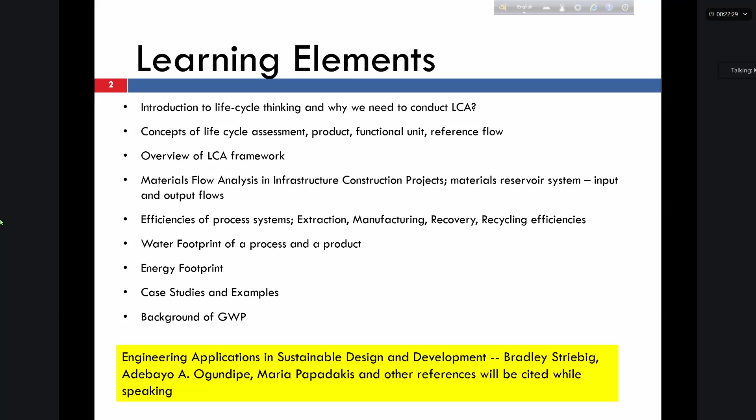So we all know the SDGs from the UN, the Sustainable Development Goals, or when we were students at BUET, I think Shamsul Haq sir was talking in class about the MDGs, Millennium Development Goals. Now, one of the things those international organizations emphasize to people is sustainable development.

So basically, whatever we develop, design, construct, we need to do in a way that meets the current needs without harming the environment and affecting the ability of future generations to meet their needs. It's a very big objective actually. So we have to design or build our road in a way that does as little harm as possible to the environment in the first place, and then without affecting the ability of future generations.

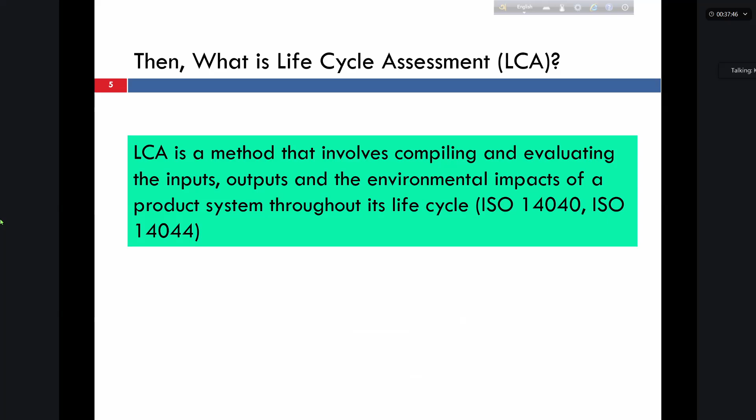But today and in the next lecture, I will basically talk about the LCA environmental component, in particular for pavement, and some other subtopics, and a little bit on the software for pavement LCA. Again, some examples of why we need to conduct LCA.

For example, we eat meat in general, and in particular beef. So the UN FAO, the Food and Agriculture Organization, predicts that global meat production will be doubled in the next 25 years, by 2050. And 18% of greenhouse gas emission comes from the cattle industry or livestock production.

And they also estimated that to get 1 kg of beef that we buy from the store, it emits 36.4 kilograms of carbon dioxide. It's such a big scale: think how much beef each nation, each country, consumes, and imagine how much carbon dioxide is emitted every day just for beef.

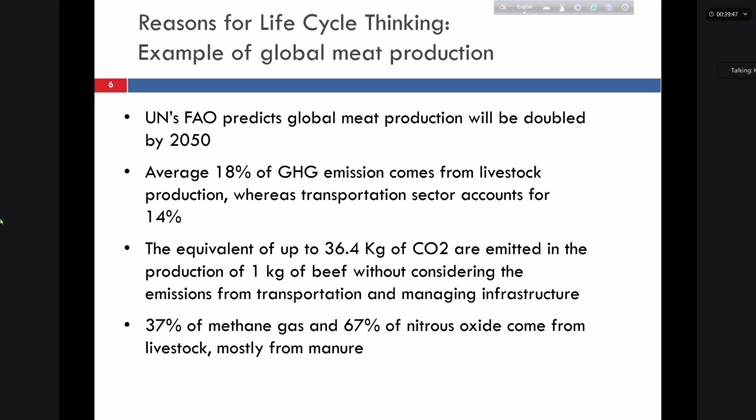Another example, again from the book. Our everyday product, like a sandwich we eat in North America, in particular bread and butter. In the book, they reported a research paper on that. The average American consumes more than 6 pounds of peanuts and peanut butter products each year. The amount of peanut butter they eat, with that jar, can wrap the whole earth.

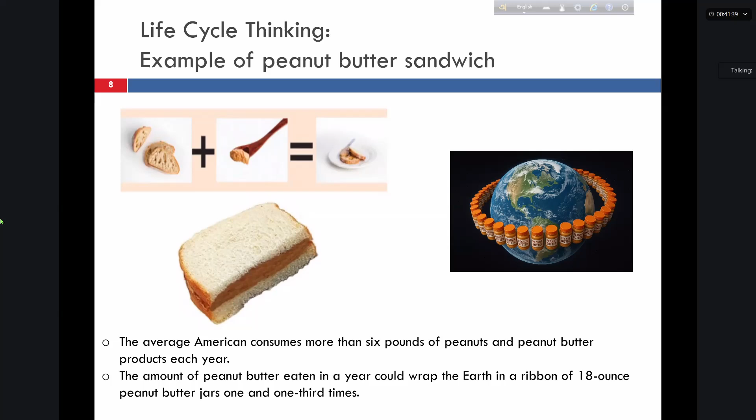So now let's look behind the scenes to make this sandwich in the morning, what people are doing. To get the bread, it's coming from the loaf. We are just taking two pieces of bread to make our sandwich, but the whole loaf is manufactured, and it's coming from wheat flour, from the wheat, and wheat is coming from agricultural land. So many things are going on there: preparing the land, watering, fertilizing, picking up, processing. There are so many stages involved to get this piece of bread in our breakfast.

And in every stage, there is some environmental relevance, either energy consumption or chemical utilization affecting the environment, deforestation, water consumption, transportation, equipment use. As you know, there is a lot of equipment use in Canada on agricultural land, and emissions from diesel burning. This is the bread part.

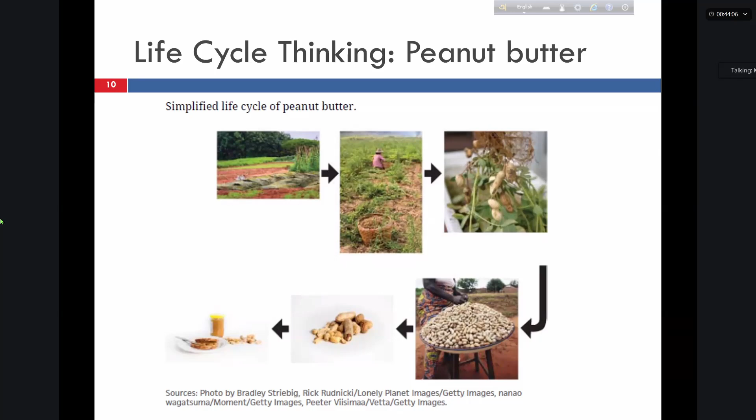So this figure shows at a glance the main processes involved to produce this peanut butter for our breakfast table. For example, to produce the butter, not only the peanut portion, we also need sugar, we also need oil. They are transported to the manufacturing facility. They are roasted, mixed, and then jarred and packaged. Again, they are transported within the factory or to another factory if done by different people. Transportation is involved. Think about the volume of the materials.

We are talking about the butter. What about the container, the jar? We need glass. We need steel for the lid. We need paper for the label, expiry date, the nutrition label. We need ink. And in most cases, they are manufactured in different plants, different cities. They are transported to another assembly facility, and transportation is another 14% of total global greenhouse gas emissions. So much petrol and diesel is burned during transportation by those big trucks.

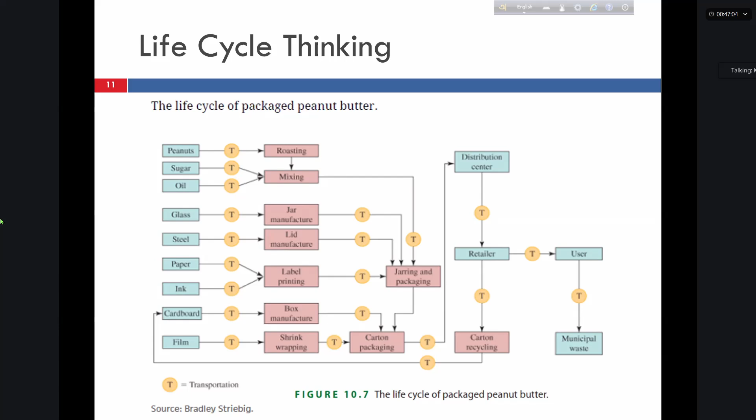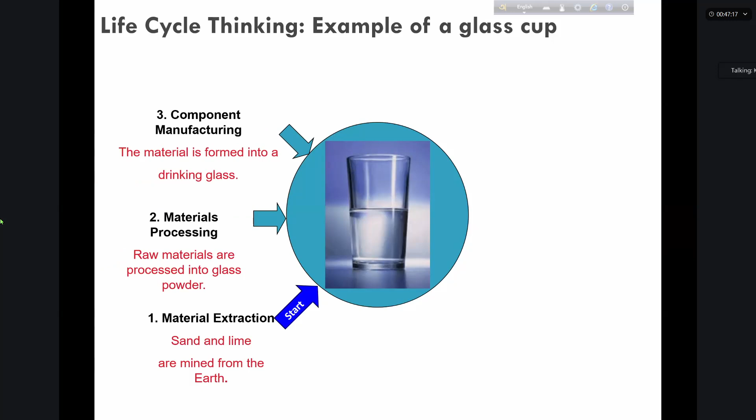Again, another example I already explained a little bit is a simple glass, but so many processes are involved to see our mug or glass on our table. First of all, material extraction: sand and lime are mined from the earth. Raw material is processed into glass powder. Then these raw materials are formed into glass, assembled, and then they're distributed, and then maintenance and the use phase, and again it goes to disposal.

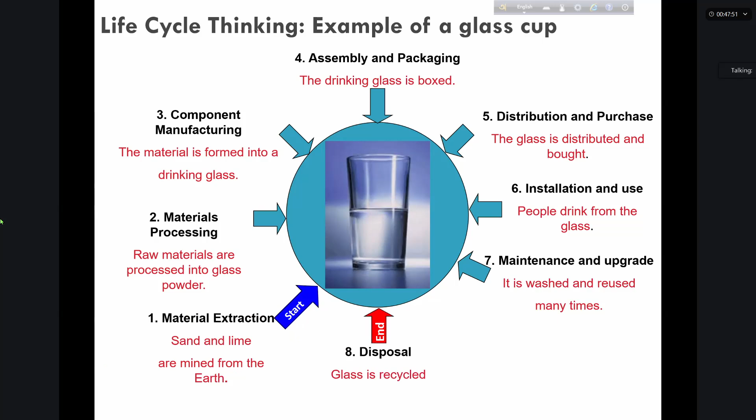So this gives an overall backbone of the stages. So basically, we are taking the raw materials from the environment. We call it natural environment or natural resources given by nature. We are transporting them to the manufacturing facility. You can think of your product if you are working. Okay, very similar in pavement and other industries.

Then after manufacturing, it is packaged or distributed, or goes to the use phase, and there are some maintenance requirements. For example, in our field, the pavement field, think about the maintenance. For asphalt, every 5 years we have to do maintenance. We cannot forget an asphalt road, but concrete probably yes, the first 10-15 years is okay. And maintenance means closing the lane, doing it again, we do a lot of shaping and paving, removing the top layer and repaving, again construction, the same cycle starts again, but at a smaller scale in the maintenance phase.

For buildings, there are a lot of maintenance activities, like I'm talking about commercial buildings, office buildings. Because we are civil engineers, managers, design engineers, executives, we probably don't look at those things, but there is a lot of maintenance going on related to leaks or the thermal system, to improve the efficiency of the air conditioning system. In good buildings, there is a lot of maintenance work going on all the time. So everything has environmental relevance or environmental impact, and then it goes to disposal.

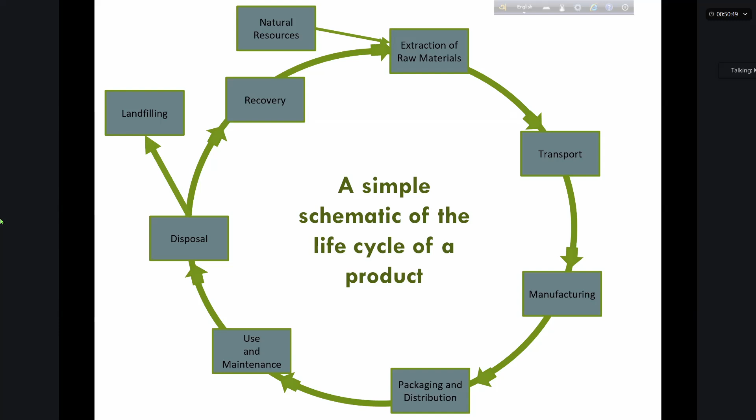Okay, so by this time we should have a good understanding of the stages of a product. Basically extraction stage, and then manufacturing stage, and then use stage or use phase, and maintenance phase, and then disposal phase. That's in general, but it depends on your product. Some phases can be merged, and whatever it is, you have to define your phases before you do LCA of your product, because that will give the boundary of your data collection.

And each stage, say in road construction, first of all we need raw materials. One is aggregate, the other is binder, asphalt binder. To get the aggregate to our desired state, say 3/4 inch or 1/4 inch, there are so many processes involved to get those stone chips. And for the binder, it's a huge, gigantic process. The asphalt or bitumen that you see people using on the road, there are so many stages and processes involved, so much engineering, because it's coming from a mix of so many heavy oils from the oil reservoir.

And so many distillation processes to separate those heavy oils coming from the oil reservoir. And after separation, a lot of engineering is conducted to make it road grade, and then it's coming to your site, and then you have to heat it up again to make it liquid, to make it fluid, so you can coat the aggregate.

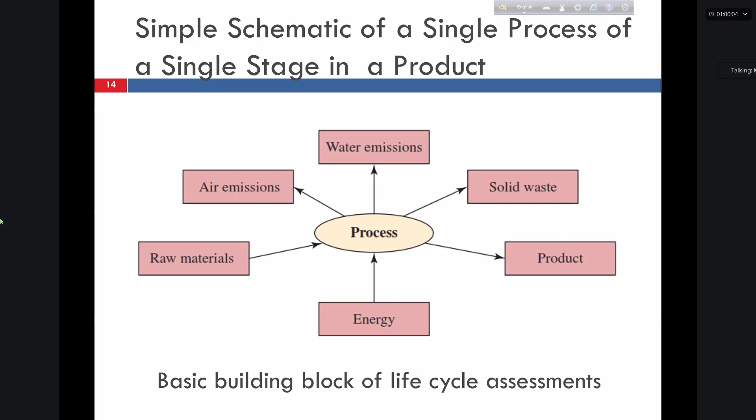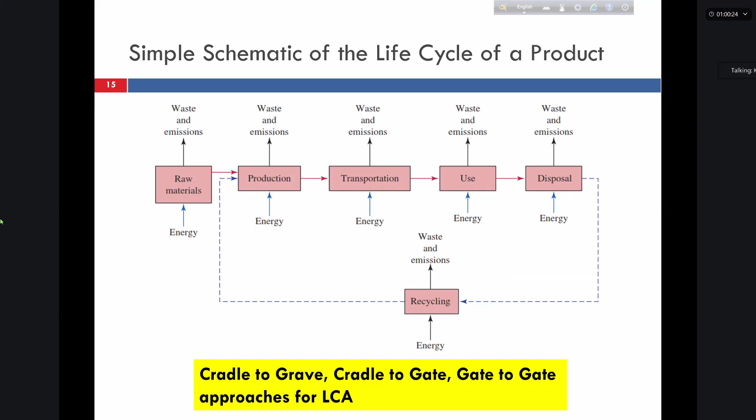So as I said, this is the building block, but at every stage, for each process, we need to capture this information if you want to do LCA. So one question probably already answered: what is the goal of LCA? The overall goal is to reduce the environmental impact, and LCCA is the cost part, which I'm not covering in these two lectures. So if you ask what the goal is, basically you want to reduce the environmental impact.

How? Because you are basically analyzing each process, and as an engineer, if we can ask good questions - oh, this is an alarming amount, like 150 degrees Celsius is needed to make our asphalt binder fluid to coat the aggregate so you can compact it. Is there any other engineering way?

We asked this question as a researcher in the pavement field. Now there is a thing called WMA, warm mix asphalt. So you can reduce the temperature to 100 degrees Celsius, or even 50 degrees Celsius. That means you're saving a lot of energy requirement and a lot of emission from the environment.

So that is the main goal - to reduce the environmental impact by better understanding the input and output of your material at each stage, through the product system.

And when it comes to objective, again, LCA is a very methodological exercise, and terminology is very specific to the field. So the objective is basically to obtain quantitative environmental impact - not just saying oh, this is better than that. You really need to quantify it. That is the objective of LCA.

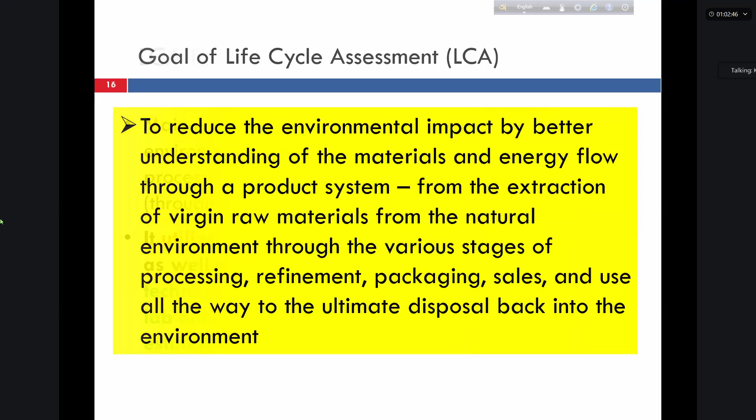A goal can be, like you see, that this process in pavement engineering - using 150 degree C - is not really worth it. It also burns the binder, affecting the binding capacity and adhesive property of binder if you heat it up at that temperature. Overall goal is to improve the pavement life as well. There can be qualitative ideas in the goal, but in the objective you really need to quantify - you need to obtain quantitative understanding of your LCA.

And then it comes to basically energy balance protocol or mass balance protocol, because we know that mass is not destroyed and energy is not destroyed, it just changes form from one to another. So to obtain quantitative understanding, we basically use this simple mass balance equation or energy balance equation to obtain the input and output in a process.

But the most difficult part is the environmental relevance, which is not our specialty, so you do not need to worry about it. This will be given - that yes, from my process, this much carbon dioxide is emitting, this much sulfur dioxide is emitting. We need to quantify it if you work in LCA. But if this kilogram of carbon dioxide is emitted, what does it mean to the environment?

So four interlinked phases are involved to start an LCA project of your product. ISO basically defines four phases, but the book that I referred to says three main phases - interpretation, they say, is involved in every phase, which is more convincing to me. But ISO defines four phases: goal and scope definition, inventory analysis, impact assessment, and interpretation.

Again, goal is very important. What is the goal of your LCA work? Is it to replace a process or replace a material? For example, there is an established example from Nivea company, a German-based cream producing company. They did LCA on their cream container - should they use a plastic container or a glass container?

I also shared the link with you guys on the slide. So their goal is to see which one has less environmental impact between glass container versus plastic container. So you will see the video as well. Just so you have to define your goal.

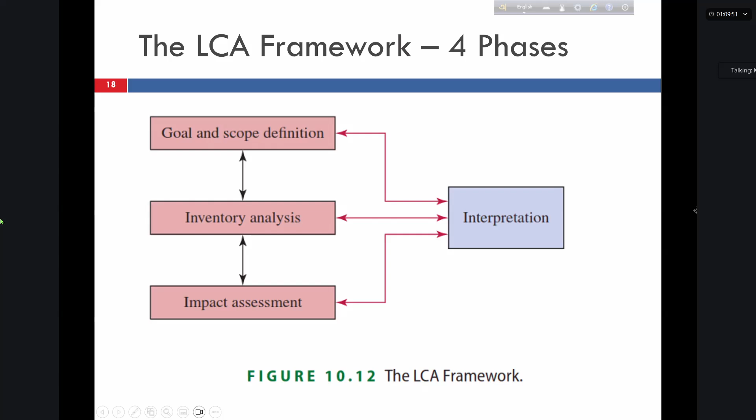I'm just a second, just a second, just a second.

Sorry, it's Sunday actually.

So if you need to know which pen is more environmental in terms of greenhouse gas emission, you want to do LCA - the raw material extraction, the manufacturing of this pen, packaging, the distribution.

Say when you do the raw material extraction phase, this steel portion of the pen is collected from the same company, or the package says 12 pens in each box, and the packages of those two companies are bought from the same packaging company - same package, you can exclude that.

So that's why defining this scope is very important - that yes, we are doing comparative life cycle assessment between these two products. We can exclude the same component used by both companies to limit the scope of the work, because otherwise it's a huge data collection exercise.

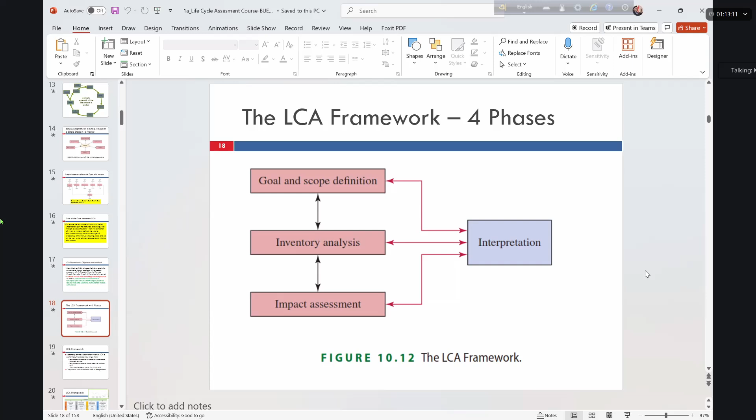So a little bit of explanation of each of the phases. First of all, as I said, defining the goal and scope - the area of your work. For example, it can be the whole life cycle from raw material extraction to the disposal.

We call it cradle to grave, because all the material is coming from nature, that's the cradle, and again is going to the landfill, that is basically the grave. It can be also just from extraction to the construction phase, or the manufacturing phase - that is cradle to gate.

Or it can be within even one stage or one phase. For example, during construction, LCA during construction - so that is gate to gate.

And in comparative LCA, when we do LCA, we are basically not comparing between the products. I repeat, when we are conducting LCA, we're not comparing between the product. Actually, we are conducting what this product does for us. So that's why the functional unit is important.

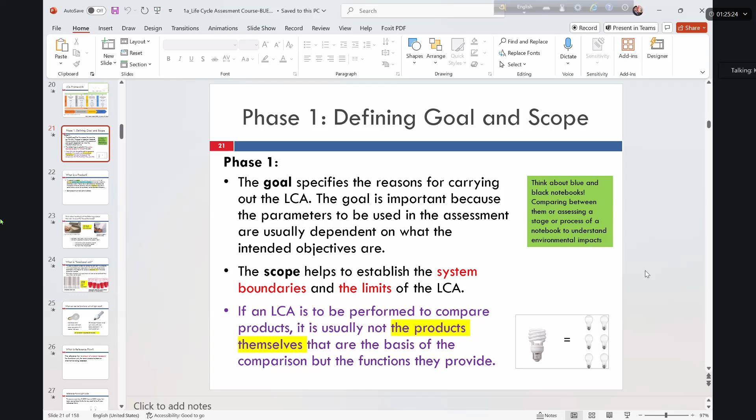So this basically emphasizes each of the phases. So I already mentioned, you really need to first define the goal. The goal will help you define the scope. And then you need to define your functional unit. So you already got some idea on functional unit.

From my point of view, the paper needs raw materials like trees or gas, something like that. But for the hand dryer, there is only a need for electricity. From that, I think the hand dryer is better. Anybody else?

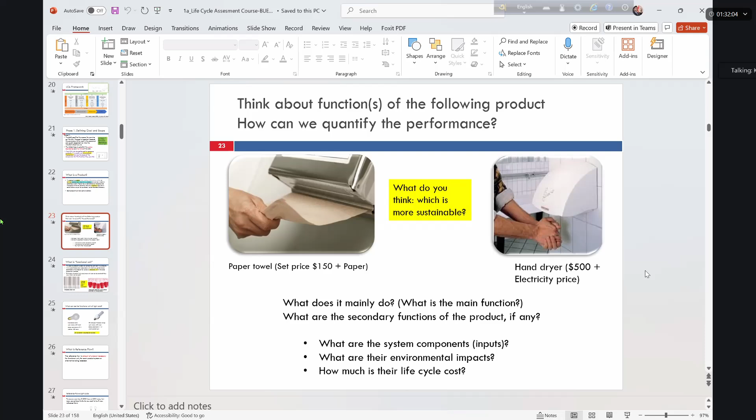Okay, so again, to give further thinking on reference unit and functional unit. When you do comparative analysis, it's not just comparing between two products. It's the function that product provides. For example, if it is a mug or glass, it is the amount of water, or the number of uses. So for this plastic cup, the intention is not just to drink a little water and then throw it. If you're in a function, you use this for the whole function, 2 hours, 3 hours. But the paper becomes soft. Once you drink water, you throw it.

Okay. So that means you probably need 3 or 4 of these paper cups if you want to compare with one plastic cup for a function. So again, I'm inducing thinking: the function that material provides and the number of times that you can use it. Both you have to consider in the LCA. Again, it's very product specific. You have to come up with a functional unit.

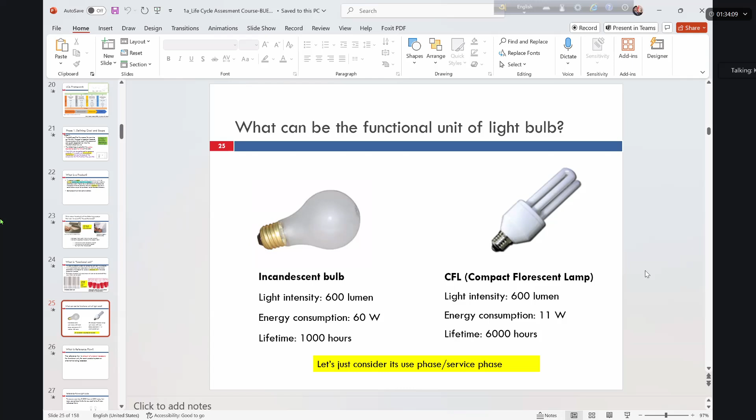We already discussed this functional unit. And reference flow is the number of products necessary for the functional unit that you are comparing in your LCA or compiling your LCA. For example, the reference flow for this regular bulb should be 6, because its lifetime is 6,000 hours and its lifetime is 1,000 hours, where the intensity is the same, 600 lumen.

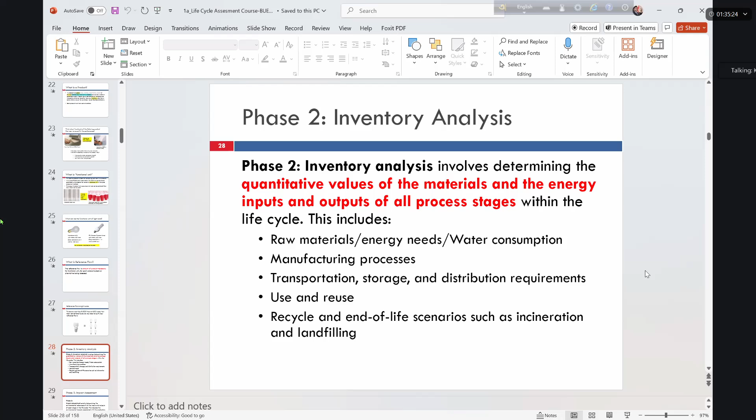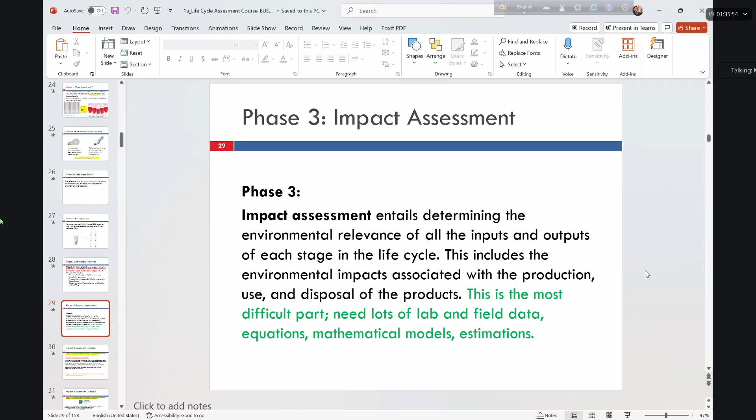which is the most difficult part, as I mentioned before, that if this is emitting, what are the impact related to the environment or atmosphere or global warming potential or health. So that occurs in impact assessment phase, and there are so many research going on in this phase, and so many organizations are pioneer to produce report for different emission that occurs from each of the stages.

For example, in pavement LCA, we use this guideline, TRACI 2.0, developed by US EPA, Environmental Protection Agency. So it has a big Excel file. I think it has 4,500 item of substance and their environmental relevance for their reported unit, that if this much of carbon dioxide emitted, this has an environmental impact in terms of, say, global warming potential or health related matters.

If you have this much of sulfur dioxide, so sulfur dioxide per kg equivalence, this has this much of environmental relevance in terms of global warming potential or health related issues or acidification potential. So EPA has already reported for about 4,000 substance. I think I already shared the Excel with my package. Otherwise, if you go to this link, Excel sheet is still there. So if you do research on LCA, you will find the environmental impact of those substances, about 4,000 substances.

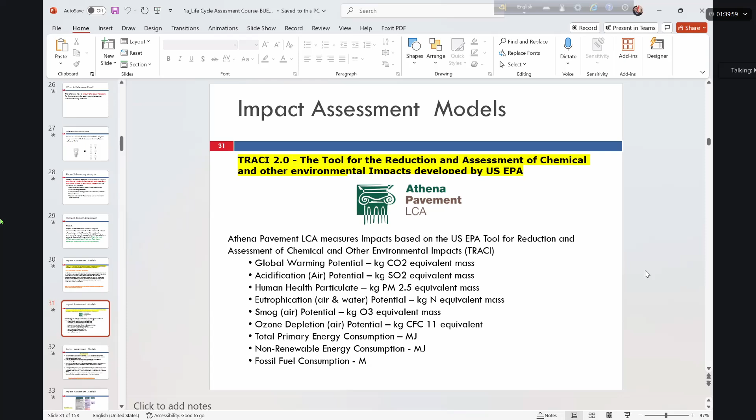Yeah, so I already mentioned that TRACI 2.0 is also used in the pavement LCA. So these are the characterization factors we use, including, as I said many times, GWP, acidification potential, PM particulate or human health particulate, eutrophication potential for water and air, smog, ozone depletion potential in terms of CFC gas, total primary energy consumption in megajoule, non-renewable energy consumption megajoule, and fossil fuel consumption. Okay, we use these factors in the Athena pavement LCA.

Then another impact assessment model developed by Netherlands Ministry of Health and Environment. They call it ReCiPe model. There's some university and private organization who are also involved. It's very established organization as well. So they basically have the impact data for total 18 indicator. They call it midpoint indicator, and 3 are end point indicator.

Like for example, carbon dioxide is emitted, sulfur dioxide is emitted. Okay, good. CFC is emitted. So what is ultimately affecting? Is it the environment or health or natural resource? So they link those impact category to the end point. Okay, like human health or environment or resource consumption.

So again, I gave you the link for the ReCiPe model. If you do research, this is again, as an engineer, we use the given information, but when you do research, you have to go deep to those report and models and use the data wisely from those report.

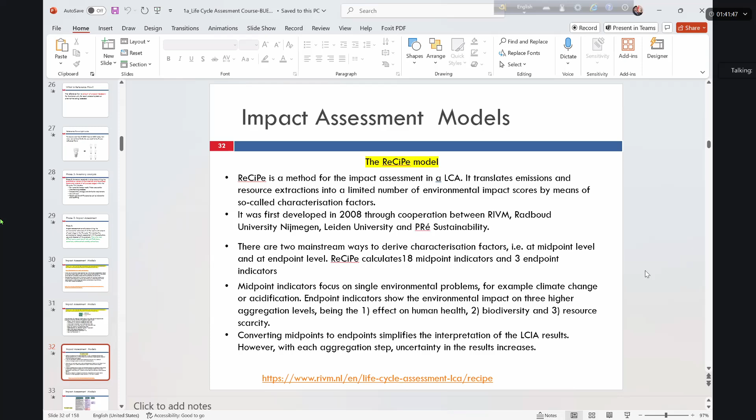If you have particulate matter, as you know from our construction dust, we have a lot of PM matters. Yes, particulate matters. It is related to our heart disease and lung disease, increase in respiratory disease. So particulate matter affects human health. So the endpoint indicator is damage to human health, for example.

Same for the photochemical ozone formation, because when the ozone layer is reduced, the UV ray can come, and UV ray influences our skin cancer and other cancers. So it is human health related, and damage to ecosystem and resource wise.

For example, if you use for your road construction, you have money, okay, and you are using stone chips all the time, virgin stone chips from the mining activities. Yes, this is the usual practice in North America. Now we started to use as much as possible recycled material, okay, without compromising the performance.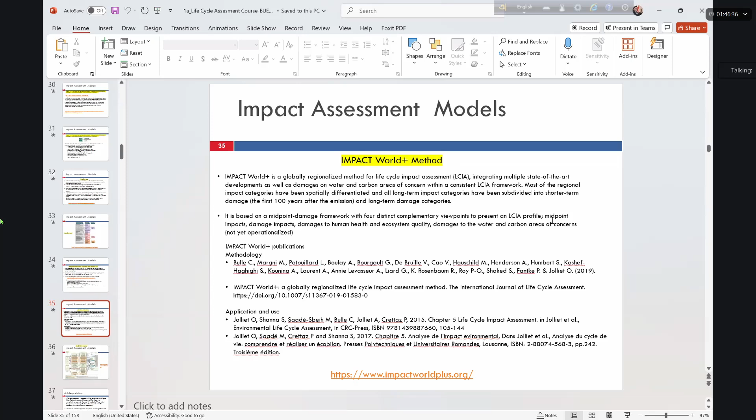Again, so many substances. All substances are not important for our project. Based on the project and your impact category, you need to obtain the substance information and their environmental relevance from their reported data. Again, very similar but a little more advanced, and disaggregate level data and pathways are there, but the endpoint is again human health, ecosystem, and resources. They highlighted, and they also kept the damage pathway and the midpoint level indicator.

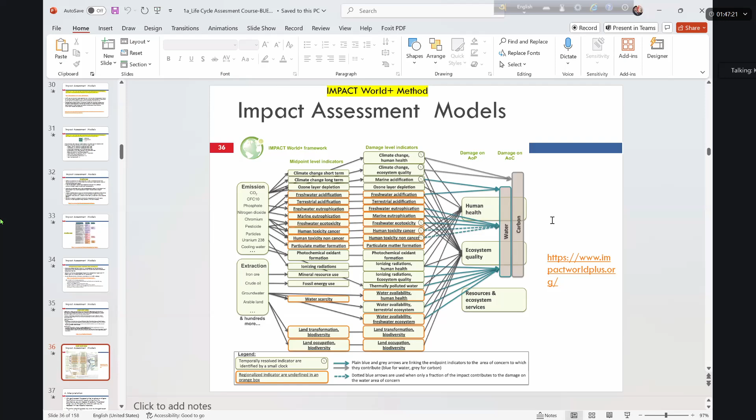Again, each model can consist of 2-3 lectures itself for the environmental expert. That is my understanding from my level of knowledge. Then the interpretation phase. It's an independent phase according to the Striebig book, but ISO basically integrated this interpretation phase in each phase. The main idea is whatever data you are collecting or assuming, you need to ask whether it makes sense or not for your LCA project. That is the whole idea.

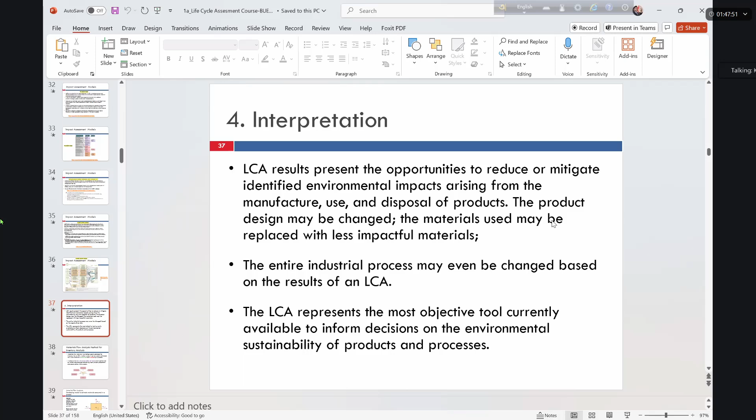So I'll stop here today. From next class, we will start the material flow analysis. These are not that technically tough, so easy. If possible, please have a look before the next lecture, so I can quickly go and give some examples of LCA projects in Canada. Okay, yeah, in my real course in Canada, it takes so long actually to cover this. Sir, I will stop here today.

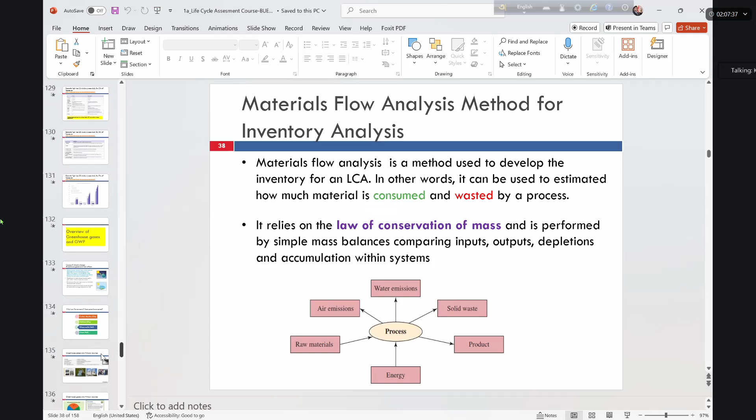Slide number 131. Sorry, so many slides, just have a quick look. Yes, just have a quick look, it will be easier for you guys.